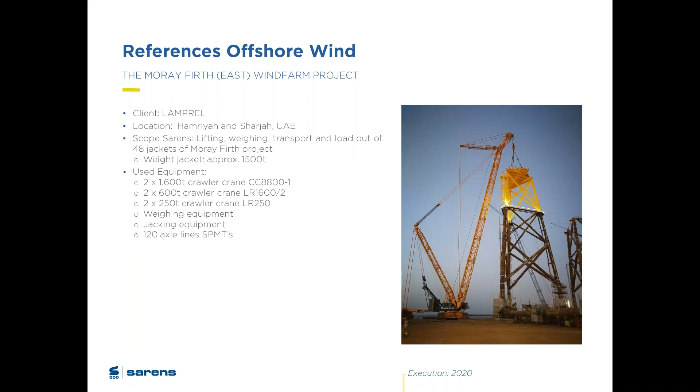Today I wanted to share our idea, and actually our credo, that everybody can rent out cranes and equipment, but at Sarens we really commit from fabrication to foundation. That's where the logistic part and also the liability comes in, where we as a company manage complex projects, combining different types of equipment. So we always find a solution at Sarens, and that could be a combination of jacket handling, TP handling, complex barge handling, or even TP handlers.

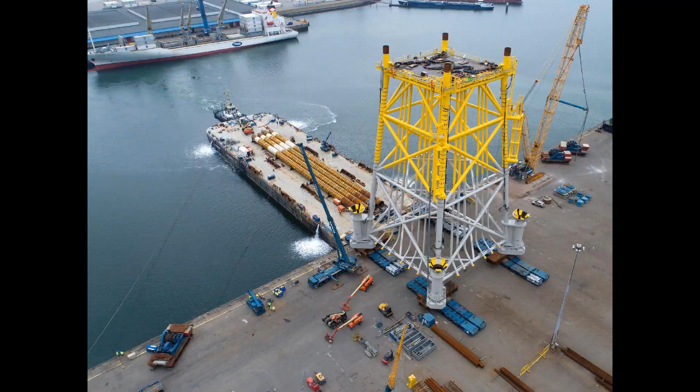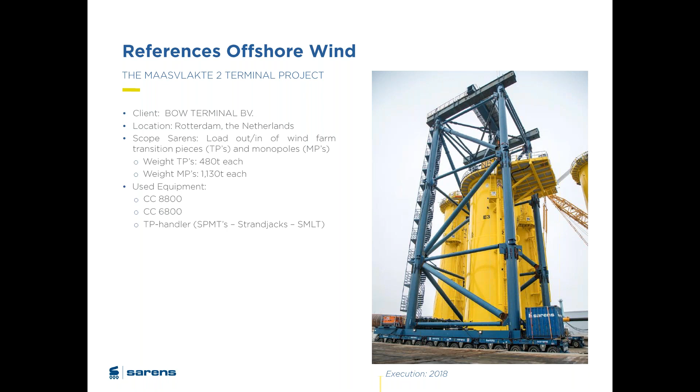That's something we also built for one of our customers - an innovative solution built by Karl Sarens to transport the TP handlers. This is the first version showing the complexity of managing this logistics onshore on the marshalling yards. This really reflects a complete picture: here you see the TP handler, the strand jacks, our CC 68s and 88s operating together with our barges.

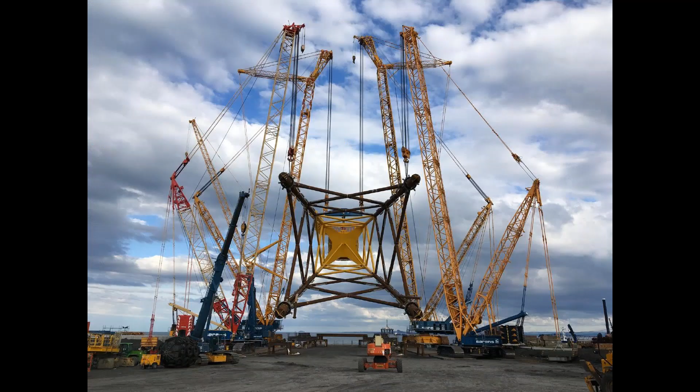So here you can see what we really mean by offering the solution from fabrication to foundation, because we combine different solutions and do these complex liftings. This is also just to show you that in total, with 4 different cranes, we can do a complete lifting project or operation. I think that's really where Sarens is making the difference today.

You can also see the grillage on the barges together with our SGC Sarens giant crane - we're offering a total solution. This is one of the big advantages of the large cranes: regarding ground pressures and bearing capacity, we can optimize due to our technical ringer crane.

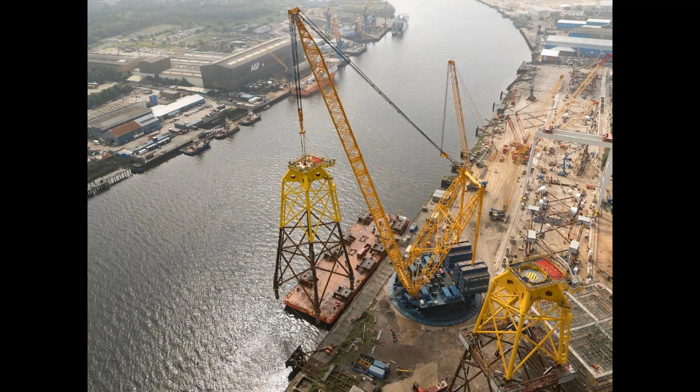This is really something beneficial, especially for older cases where we are always looking for the best solution. Here you can see our SGC 120 operating together with the barges and smaller equipment. I think this was one of the first projects with DEME, one of the Belgian marine contractors together with Jan de Nul.

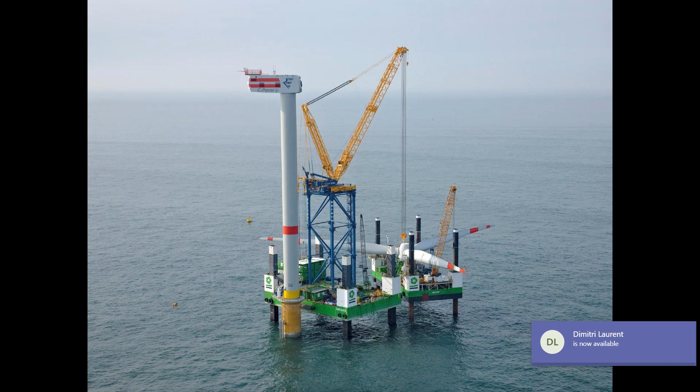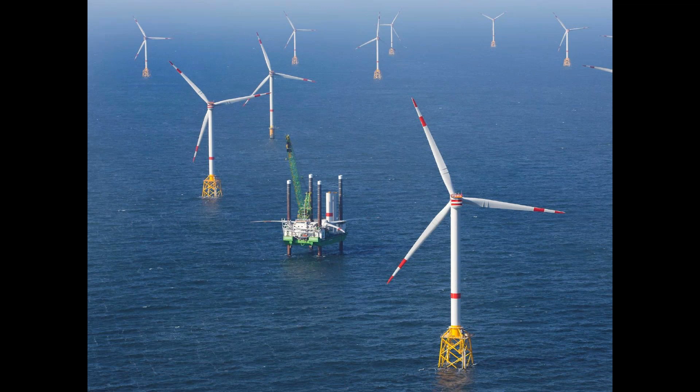These days we receive a lot of inquiries from shallow water operations, where Sarens is mainly focusing on onshore logistics, meaning everything related to port marshalling activities, but also shallow water applications where our expertise is required, as we already did on other projects. This shows a roll-off operation.

This is in China. As an international company, we are following our clients, and it's clear that offshore wind is not only in Europe. We are looking to Asia and the US today, in order to follow our clients and support them with the right logistics.

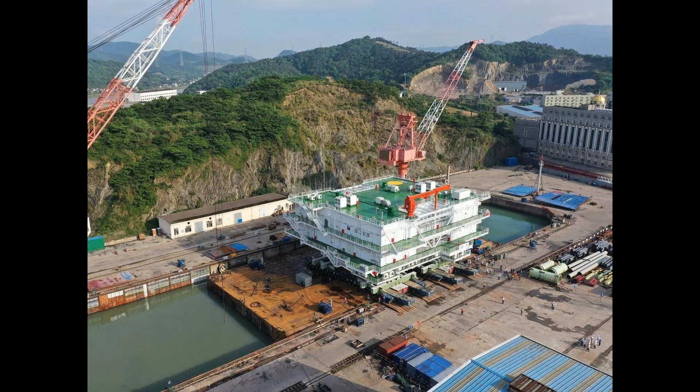That's really our goal. It's clear that everything is getting bigger and heavier, so on that side we don't have any limitations. We optimize our equipment and combine different technologies and equipment in order to find the best solution for our clients.

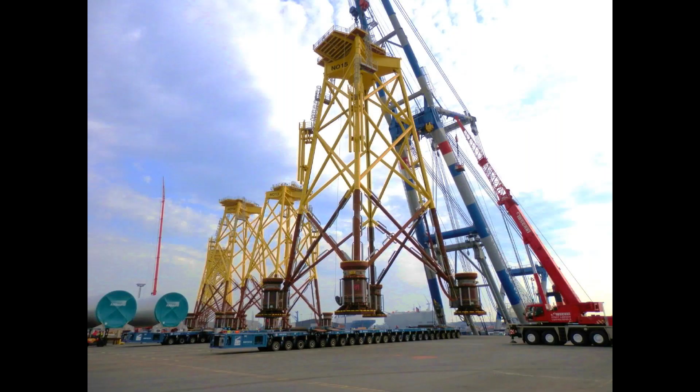It's clear here the jackets on the SPMT handling. This picture shows a huge challenge in this application, where the ground bearings of the quay were not allowed to handle the complete transport. So here we lifted up the spans to make sure it didn't touch the quay or the ground up to the barge, which shows the inventive solutions we are able to develop together with our clients.

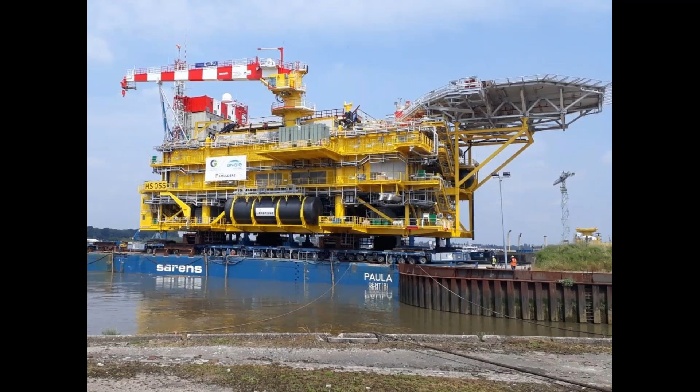This shows the same picture, again in different combinations, like the grillage on the pontoons, in order to give the full service. It's clear that products get fabricated in one part of the world and transported to another part, to the marshalling activities where everything happens.

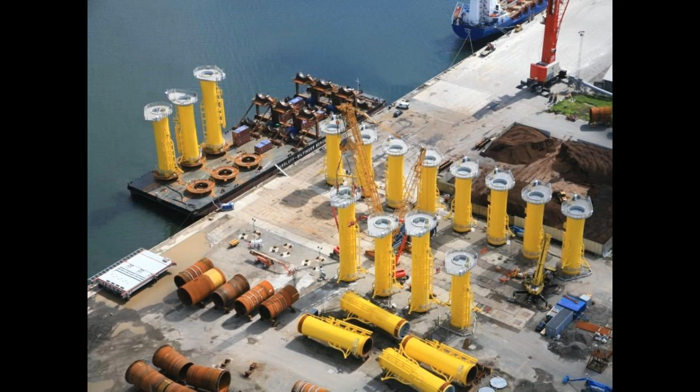Also with Sarens, we have large extensive experience operating worldwide, mobilizing and demobilizing our equipment all over the world, so there are no limitations on that side. But it's always impressive to see how big this kind of equipment is, and what kind of equipment we are handling.

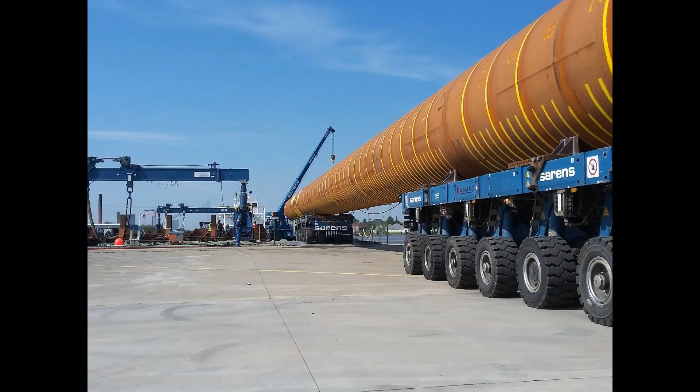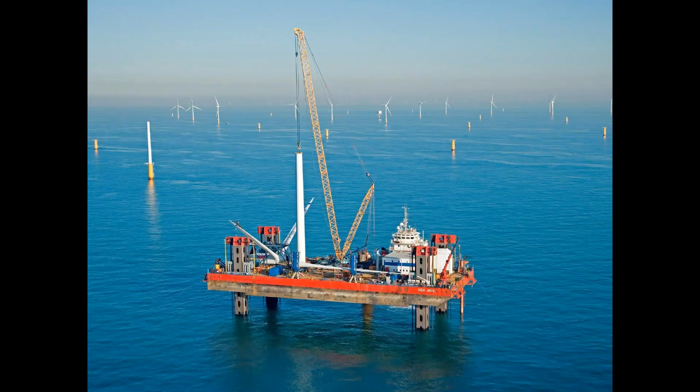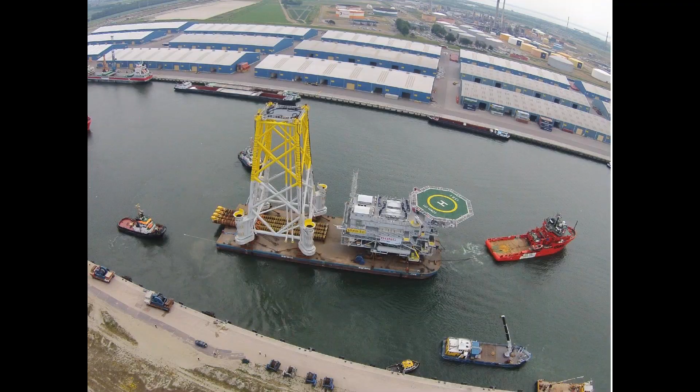It's a matter of managing liability, and that's really important to mention - managing liability and providing the best solution is really our key challenge. And of course, being on time and making sure everything happens safely and well organized.

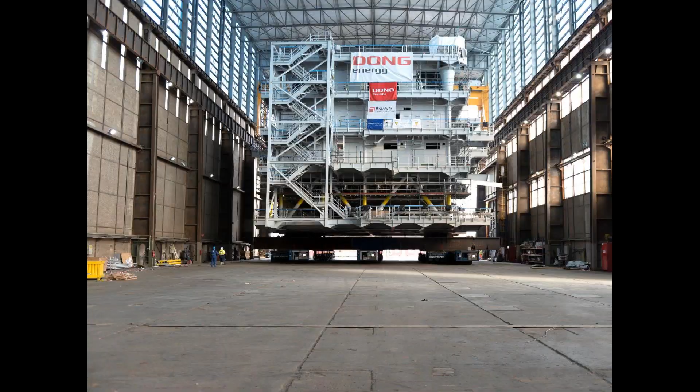Here you can see the saddles on the SPMTs. Sometimes if you have different diameters or lengths to transport, we can easily modify the diameter of the saddles. That's really beneficial if you're in a complex environment.

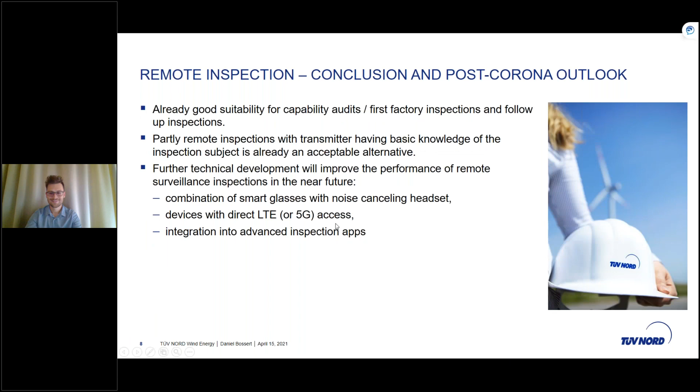Thank you, Ilya. First of all, I want to thank you that we got the opportunity to share our experiences with remote inspections we made through the last months. This is a service which is already under development at TÜV NORD for years, but which moved into focus beginning of last year due to the Corona pandemic, and the travel restrictions we all experienced.

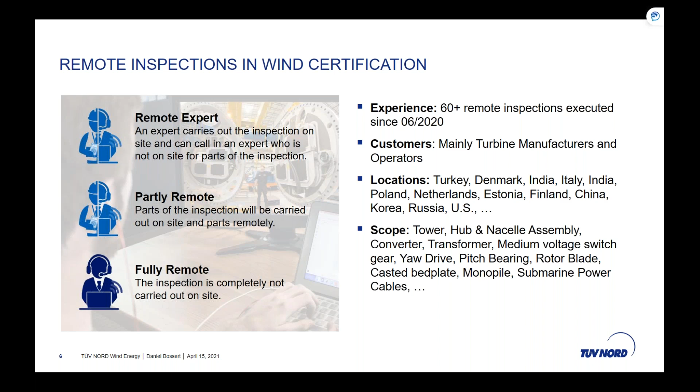With the travel restrictions caused by the Corona pandemic starting from March 2020, the further development of remote inspection really gained speed at TÜV NORD, so that we now have a track record of about 60 remote inspections since June last year, only in the wind industry. That enables us to proceed with our clients' projects without compromising the agreed timelines.

There are, of course, some problems which we identified in the course of the development, and also lessons learned from the inspections to date. An aspect which fortunately was already addressed quite early by our colleagues from TÜV NORD Mobility is data security. They developed a dedicated app called Live Expert, which complies with the General Data Protection Regulation of the EU.

As a second example of problems we faced, we experienced that the permanent movements of the camera device caused symptoms similar to seasickness in the receiving inspector in the office.

But still, there are additional limitations with regards to the video picture, as the field of view which can be recorded by standard mobile devices like a mobile phone or tablet is reduced. This can also be improved by the use of better camera technology, like an action cam.

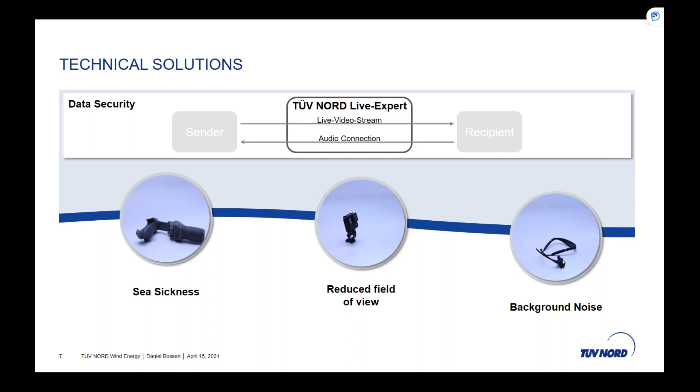But still there's room for further improvement. As a last example, one can imagine that the communication between the transmitter and the receiver is of very high importance for the efficiency of such a remote inspection. So we recommend the use of headsets with noise cancelling options wherever possible and wherever this does not compromise the safety of the transmitter.

To conclude, I can say there are already existing technical solutions, and we have reached a quality and efficiency level so that we consider the remote option as equivalent to, as already mentioned, capability audits, first factory inspections, as well as follow-up inspections. The same applies for partly remote inspections, with a transmitter having basic knowledge of the inspection or the inspection scope.

For fully remote inspections, to date, we allow those for up to 50% of the total number of inspections planned for an individual project at an individual manufacturing site. This figure may increase further with technical improvement of the equipment, bandwidths, and software applications. I personally expect this remote approach will remain more and more attractive even post-corona, since it brings along many benefits on the economic side and other sustainability aspects.

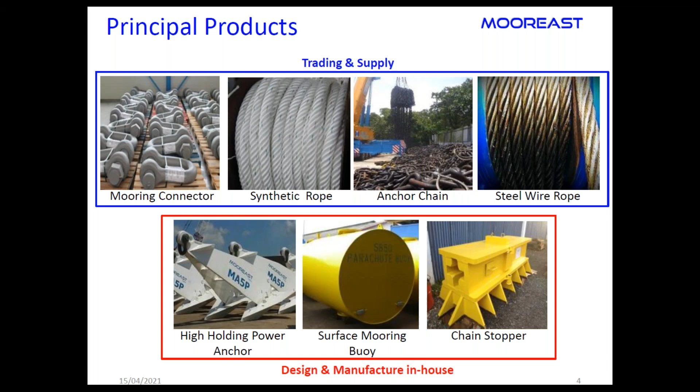We also have our engineering team located both in Singapore and in Rotterdam. We do geotechnical analysis of drag embedment anchors, but also for other foundation types. Structural analysis is performed on all our products leaving our factory, according to applicable class rules. We can also perform mooring analysis, which basically allows us to design a complete mooring system for the client according to what is required.

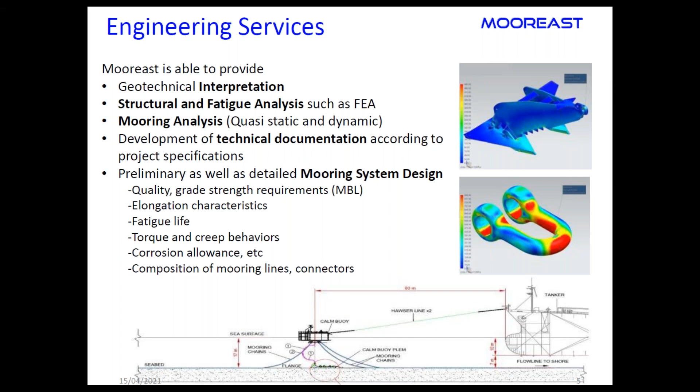So now we go into the subject matter, the drag embedment anchors. We basically have three types. The first is the MA5P, a general purpose anchor suitable for a wide range of soil conditions, running from sand to very soft clays, and it has been applied for both temporary and permanent mooring systems.

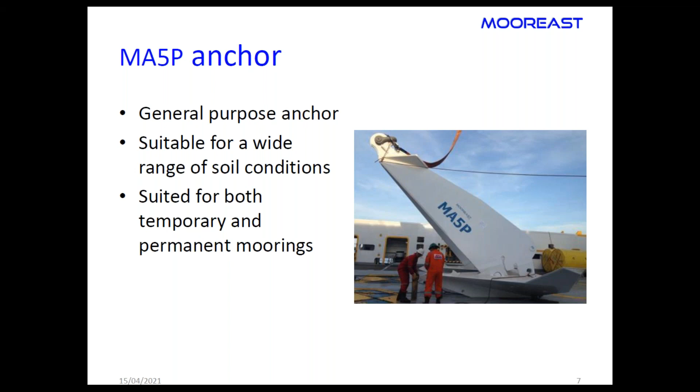We have a specialized version which we call the MA5S, a modified version of the MA5P. It is smaller for the same weight, and we've designed it to be suitable for very hard soil conditions, cemented soils, but also some areas in the North Sea which consist of extremely hard clay and require specialized anchors to be used.

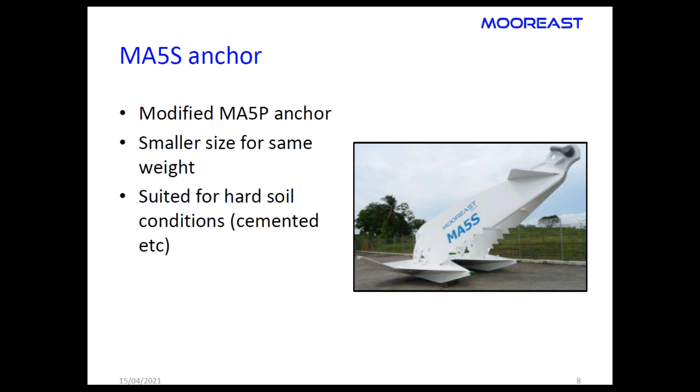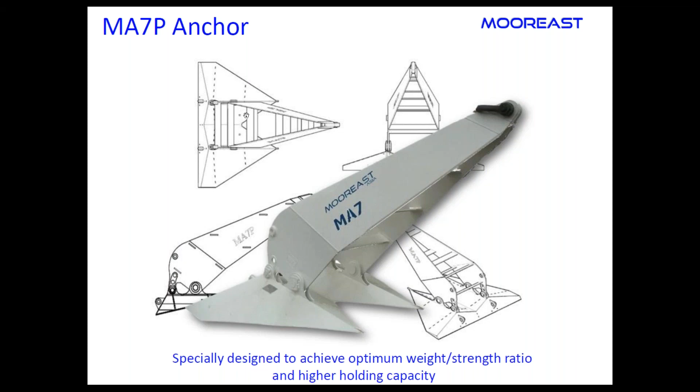Looking at the use of our drag embedment anchors, they've been used worldwide. Basically any area that up to now has been of interest for oil and gas activities has also seen the use of drag embedment anchors. And now also more recently with floating wind turbines and other renewable energy floaters.

Drag anchors are being used everywhere. They've been used in wide ranges of soil conditions, very soft clays, which you generally find in very deep waters, but in some places also in river delta areas where the soil has been deposited, all the way up to hard clays, which we see a lot in the North Sea area. Also, if you go to the east coast of Canada, sands are very common, but also cemented soils and carbonate soils, which are typical of the Western Australia coast or some areas in the Persian Gulf.

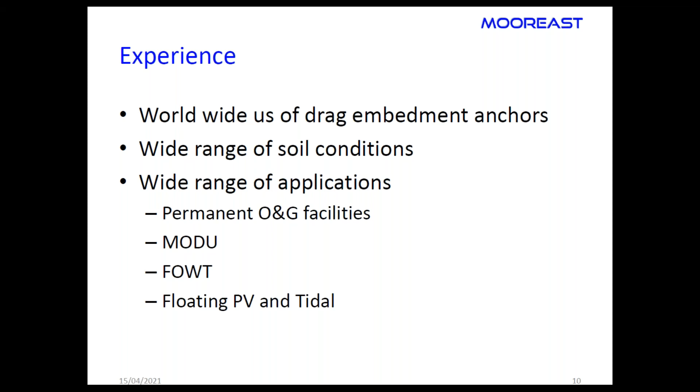So now looking specifically at floating offshore wind turbines, I'm going to pose the challenge that the soil type or the location is not the challenge when selecting drag embedment anchors, because there's a long history in a wide range of soils for drag embedment anchors to be used. But the challenge is more in the fabrication of the product for a commercial wind farm. This is not specific for just a drag embedment anchor, but also applies to the complete mooring system.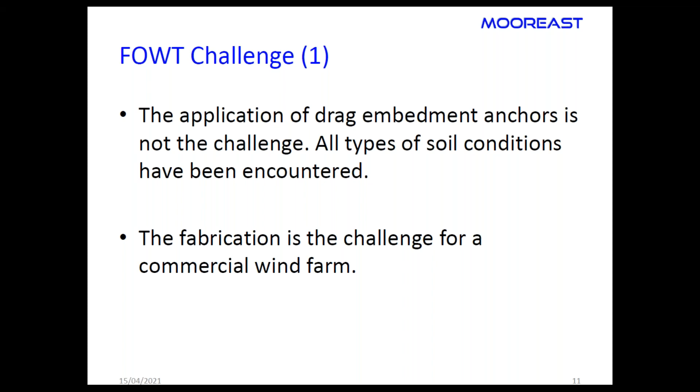To put that in some perspective, a typical oil and gas floating facility will have anywhere between 6 to 12 anchors. There are larger numbers that have been used, but this is a typical range. If we look at the demonstration projects for floating wind turbines, which have basically been single units, you're looking at 3 to 9 anchors being used. So this is in line with a floating oil and gas facility.

But if I now look at a complete wind farm, and I've used 50 units of floating turbine as an example, the number of anchors that are required goes up to anywhere between 150 to 450. So we see a huge increase in anchors being needed.

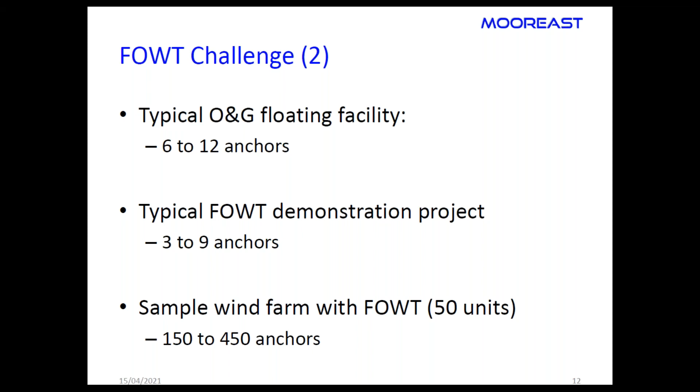So with the fabrication, this leads to the following smaller problems. You need a large amount of cut steel plate. You need a large amount of round bars. The connectors connecting the anchors to the mooring lines. There's many welders required to fabricate the anchor. You get a large number of inspection points, checked not only by internal QA personnel, but also by classification society. And you would also need large storage facilities, because the anchors will get quite big.

And there's a lot of anchors there. So this needs to be looked at quite carefully to ensure that the product can be supplied for the project.

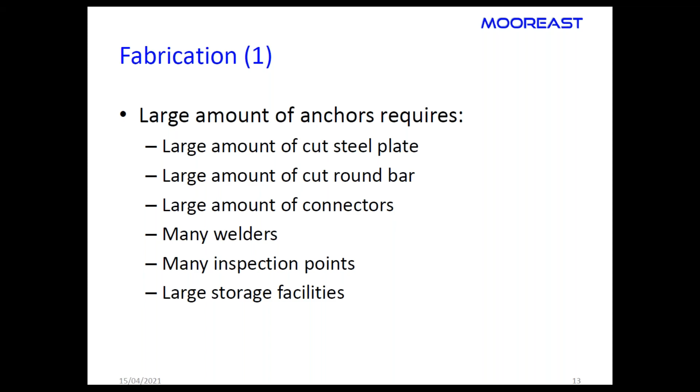But of course, there are solutions that can be developed. For example, delivery of the product in batches. So instead of supplying a large number of anchors, coordinate delivery with planned installation of the equipment, so that the use of storage facilities is limited. Start discussions with our subcontractors at a very early stage to ensure that the products can be supplied on time.

Depending on what is needed, this can involve long delivery times, but some products can also be quicker. Consider using multiple subcontractors.

For example, here in Rotterdam, we already use a number of subcontractors for fabrication and for steel plates. This can be extended to other locations depending on where the project is. For example, if there was to be a large project in the USA, we could consider doing local fabrication there with multiple yards fabricating the anchors. So these are all possibilities.

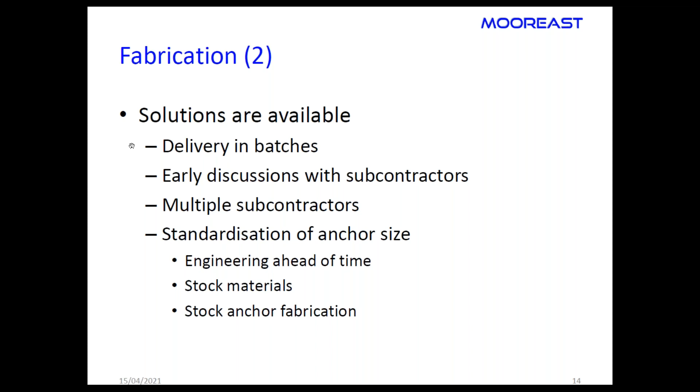So basically, I've wanted to show you the drag embedment anchors - that yes, they can be used on floating wind turbines, and yes, there will be challenges when we use them, but these challenges can definitely be overcome so that the product can be supplied on time for the project. And with that, I come to the end of my presentation.